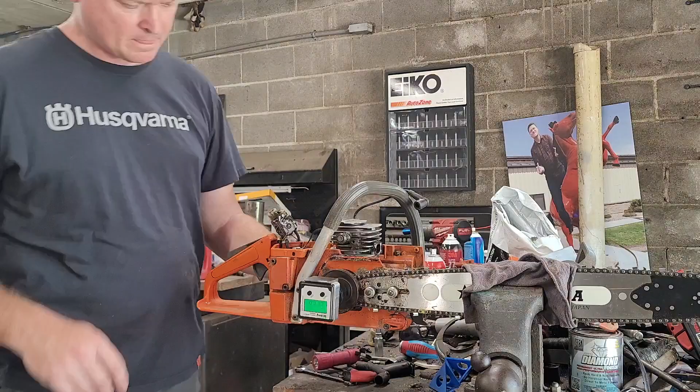Well, it doesn't always go the way that you want it to. You know how these things have this bulkhead? The worst part about a 55 is all the plastic intake pieces, and those two little holes that now have JB Weld in them.

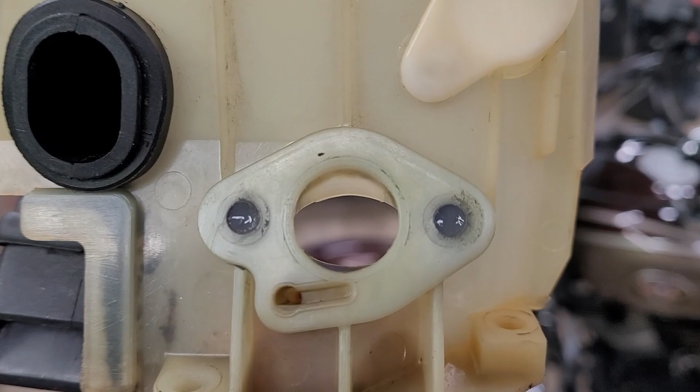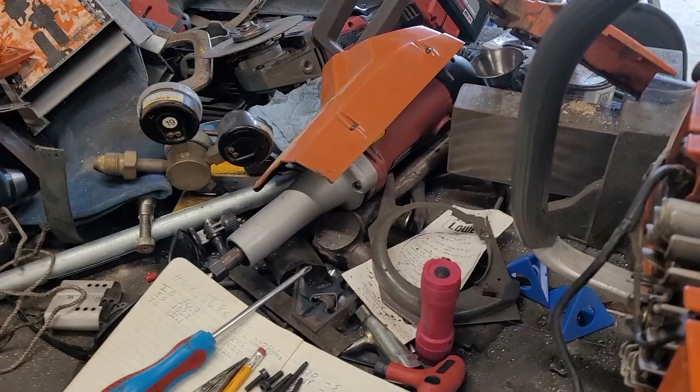Yeah, I remember from the last time I put this thing together, they're really, really easy to take apart, put back together. They're great to work on. As you can see here, I don't have the top handle off, you can get to everything while the handle is still on there. It's really great, really easy to work on. The clutch is wonderful because it's one of those, where is it at? It's probably, there it is.

It has a 15 millimeter nut built into it, so everything about it is really easy to work on. You don't have to have a special tool to get the clutch off. It's just a fantastic saw. But everything...

has its downfalls, and that thing's downfall is all the plastic bits and pieces that make up the intake. I believe that piece I had to JB Weld is called a bulkhead. I cleaned it up really well, cleaned down in those threads with some brake clean before I JB welded them shut. Tomorrow, or probably Monday, I'll go back in and drill that out, and hopefully it'll last and be better. I should probably order me another bulkhead right away.

But as far as the porting goes, since this video went kind of a different way than I had planned, let's talk about the porting. There it is. I was thinking of going all out right away and putting in this domed pop-up piston. It's not just a regular pop-up, these are, in my opinion, way better. For one, you got a lot more material there. Two, it's smooth, it's rounded, it's not squared off. So I was going to go ahead and throw that in there right away.

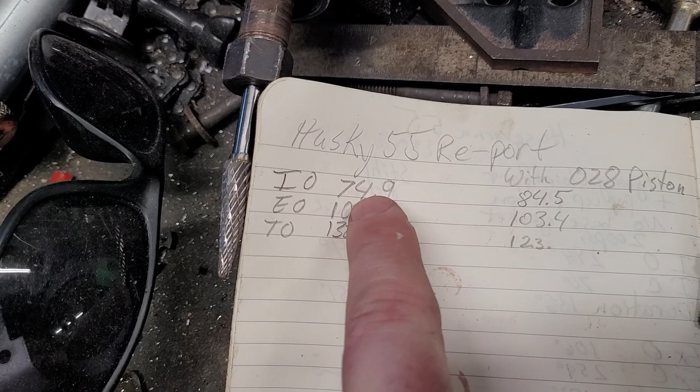All I did was hit the transfers, because I remember that my numbers were pretty good from whenever I ported it. Let's see, here they are. My intake was at 75 degrees, which is pretty good. The exhaust was at 103.3, which is pretty good. And my transfers were 132, which is shite.

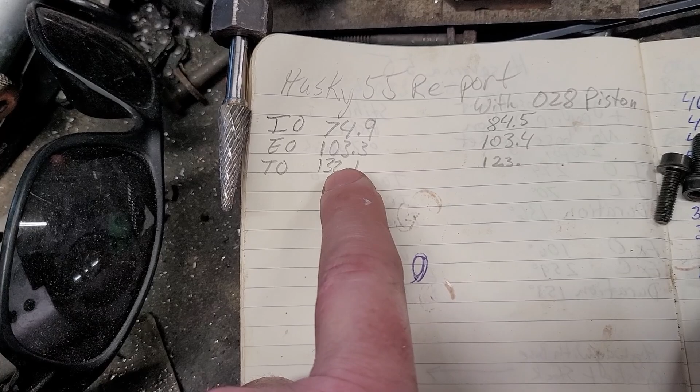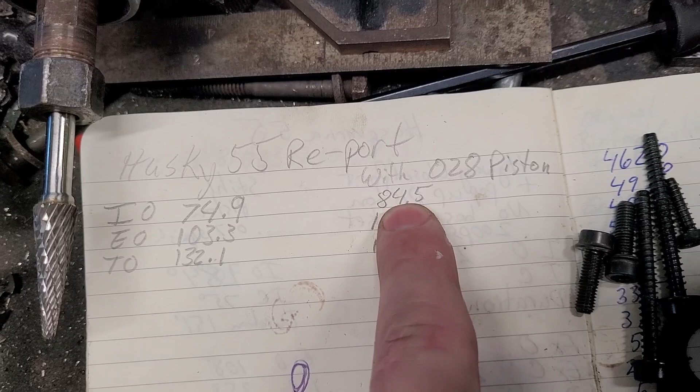The reason they are that way is because whenever I ported this, I did not have the ability to hit my transfers. So what I decided to do, this was with the 028 piston, here's how my numbers changed. We went from 75 all the way up to 85, or 84.5, on the intake opening, which is a lot. The exhaust stayed the same.

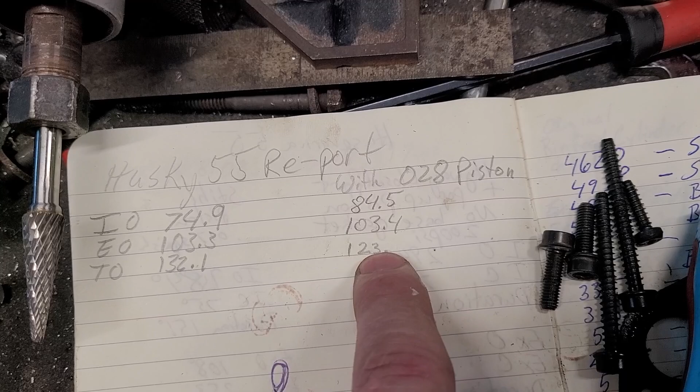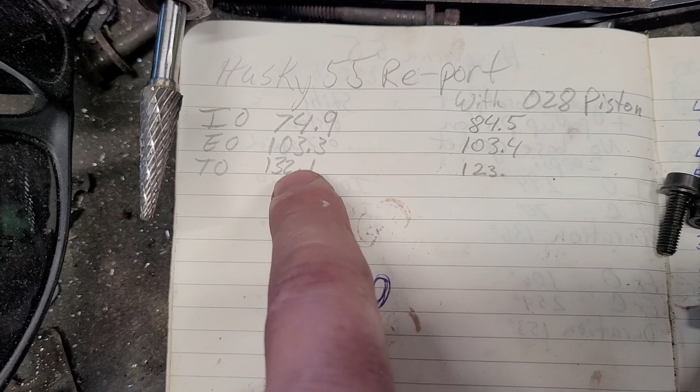And so that meant the transfer stayed the same, and I went ahead and put that there because I immediately knew that I would be aiming for 123. So what I did inside this saw now is this: it's still got the Hyway pop-up piston in it, so these numbers are the same. But I did hit the transfers, so the transfers will be 123.

So I figured I was going to make this a video about the difference between being able to hit the transfers versus not being able to hit the transfers. However, I can't do that because I'm waiting on the bulkhead JB weld to dry, and I figure I might as well go ahead and push out this video anyway.

So what I'll do is compare my shitty port job with the transfers not done to this stocker. I'm going to go ahead and put the bar and chain, that Sugihara bar and chain, on here. This is completely stock. Isn't she minty? Minty fresh right there, Husqvarna 55 Rancher. We'll see the difference between completely stock to not the best port job, with a pipe muffler.

So without further ado, let's see them saws compete. Okay, so here we are with the bone stocker, not even a muffler mod. Let's see how it does.